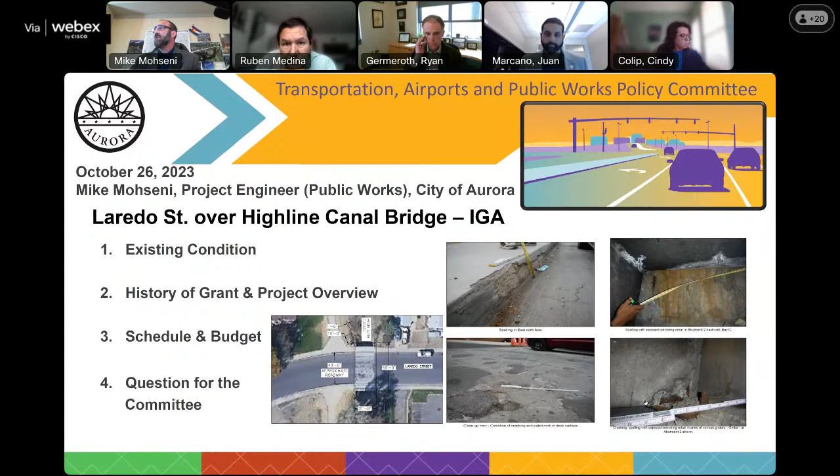Going with the existing condition, the photos show a plan view from the top. As you can see, there's a lot of problems with the deck area because the girders are actually representing the deck itself. The sidewalk, as you can see, is falling. The girders have not had the latest code when it was designed in 1970 and built, so they have some issues with cracks at the end being unconfined.

History of grant request and project overview: October 26, 2022, City of Aurora attempts request grant to replace existing bridge through Colorado Municipal League, a nonprofit organization which works with cities and municipalities to cater to their needs. April 23, after several attempts and presenting different documents to them, Aurora receives approval letter from CML to fund bridge replacement. October 26, 2023, which is today, we're in TAPS for approval to execute the CDOT funding IGA.

Just to give you a little bit of the scope of work here, on the right side there is the depiction of the section views of the new structure. It would be a CBC bridge. Design and construction would be for a vehicular bridge, which spans Laredo Street over Highline Canal. Laredo Street, for those that may not know exactly where it's located, it's about 5 blocks east of Chambers on Colfax, and then the bridge itself is 2 to 3 blocks

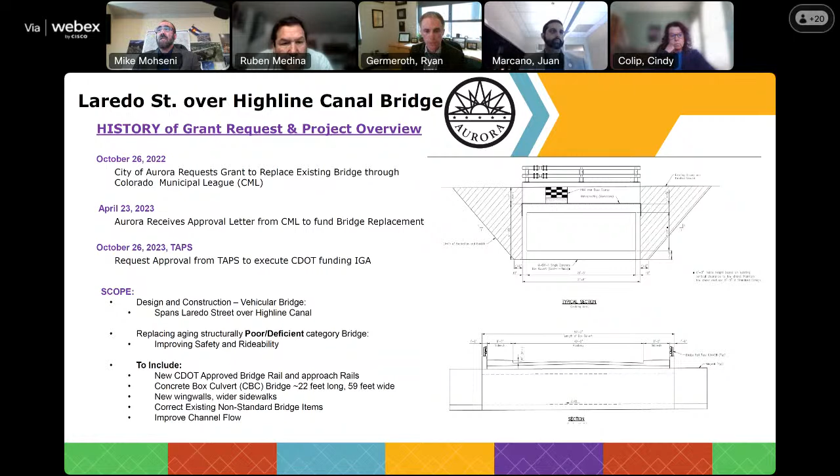north on Laredo. We're replacing an aging, structurally poor, deficient category bridge. We have a few of those bridges we've been able to get grants for, and hopefully we can one by one replace all of those bridges too. On this bridge, we're going to include new CDOT bridge rail, approach slab, approach rails, and bridge rails. As I mentioned, it's going to be a concrete box culvert, approximately 22 feet, 59 feet wide. We're going to have new wing walls, wider sidewalks. We'll correct the existing non-standard bridge items and improve the channel flow.

We have the proposed schedule and budget here. The proposed schedule would be for early 2024 to have the IGA executed, and for fiscal year 2024-25, design and environmental assessments would be taking place. 26-27, we're planning to be in construction, and hopefully by 27 or early 28, the new structure open to traffic. Total estimated bridge replacement cost is $2,223,700.

CML/CDOT has federal award funding share, and the funding is as follows: federal 80%, local 20%. For the numbers you see on the screen, 1.8 million almost, and 445,000 for the local, for a total of 2.223 million.

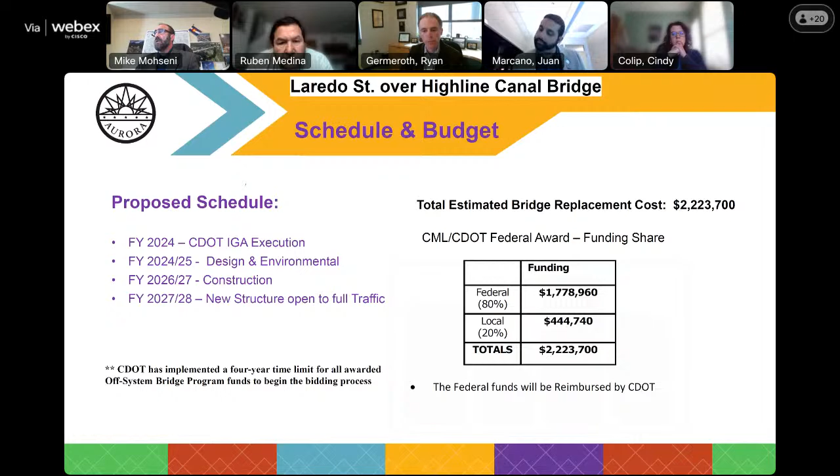With that, my presentation is over. I have a question for the committee: does the council committee support moving forward the resolution and the intergovernmental agreement with Colorado Department of Transportation and City of Aurora for the Laredo Street over Highline Canal Bridge replacement project to the December 11th study session? I'm here to entertain any questions.

Thank you, Mike, for the presentation. Councilor Medina, do you have any questions or comments? Well, thank you, Mike, for the presentation. Now it looks like that bridge is definitely overdue, so I'm glad it's getting some attention. Agreed.

Yeah, and likewise, I think that bridge needs some love, and I'm really excited to see that the federal part of this is 80%. I think that's very generous, and Lord knows we need some infrastructure investment, so I strongly support this. Thank you. I appreciate that.

Next up on our agenda is 4B, Vision Zero and Transportation Safety Evaluations. I believe, Carlie, you're up for this one.

Yes, this is my item. Let me know if you can see my screen. Everybody see it now? Okay, great.

My name is Carlie Campuzano. I'm the traffic manager in the Public Works Department. This presentation is on Vision Zero and how we conduct transportation safety evaluations.

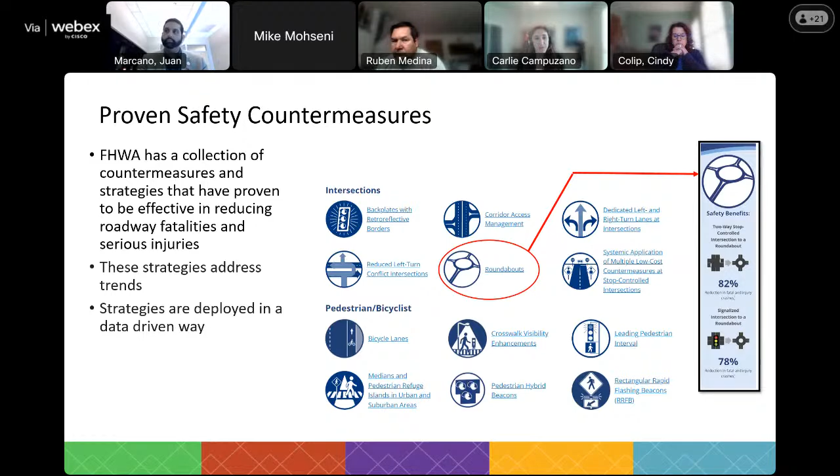With that, I wanted to get into some of our current and planned projects on the books. First, one I'm really excited about is a safety action plan. We partnered with Adams County, who are taking the lead, as well as other agencies, and we're going to do a very comprehensive safety action plan starting next year.

It's funded by a TIP grant, about a $2 million project, and it'll help us look at what's going on at a bigger level too, not just in Aurora, but a deep dive into all of our crash patterns and fatal crashes in Aurora. That effort starts next year, probably a one to two year timeframe, and will come with a commitment to reduce fatal crashes. A lot of the Vision Zero elements we're talking about will be encompassed in that plan.

We also recently kicked off a multimodal transportation master plan. We'll bring information to the TAPS committee specifically on that later, so I won't get into it much, but through this effort we'll get a lot of public feedback, which will help inform future roadway standards. A lot of what we're talking about with safety can also be incorporated into the master plan.

We also have specific design and construction projects funded from grant money. Right now we're rebuilding five traffic signals based on crash patterns and some of those approach turn type crashes we were seeing. Those are under construction right now.

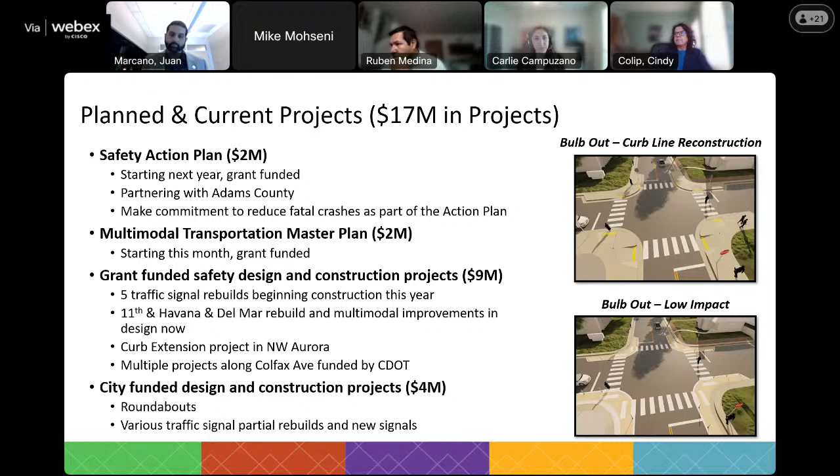And then some completed safety projects. We've done some of the smaller, lower cost projects I talked about, including some all-way stops, like Piccadilly and Stephen D. Hogan, and County Line and Powhatan. We have 2 more all-way stops coming in the next month for safety related reasons as well.

Next, I wanted to touch quickly on the fiscal impact if we were to adopt Vision Zero. Chair Marcano, I think this is something you specifically requested a few months ago, so we wanted to include it. We looked at all the Vision Zero requirements and how other agencies have needed to staff up to meet them. Based on that, we would need 3 full-time staff to run a Vision Zero program, plus costs for annual reporting and updating the safety action plan, and annual funding to implement projects. On the low side, as a minimum, we estimate about $2.4 million per year if we adopt a Vision Zero program, and that would be a recurring expense.

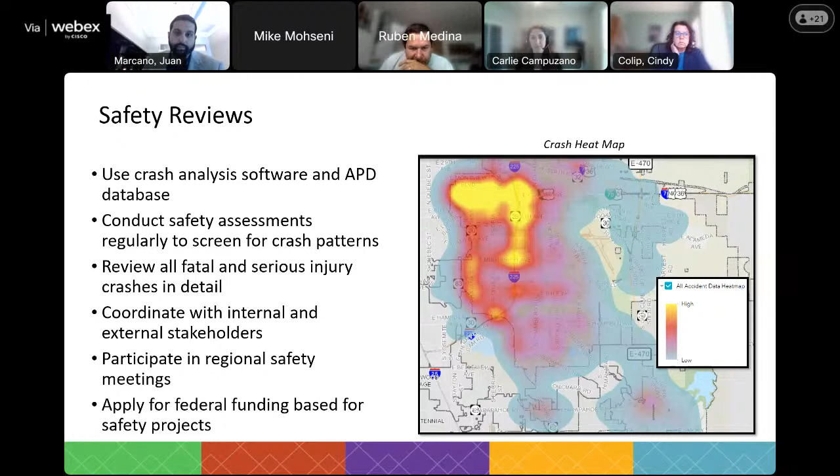Carlie, I've got a couple questions for you. You included the costs for what a Vision Zero program would look like, which I appreciate. But I also want to know what are the benefits that we derive from that - my understanding is that you'd get access to different grant funding sources and things like that. Could you elaborate a little bit on that?

Yeah, that's a good question too. The benefits would hopefully be that you decrease crashes, but I think the hard part about Vision Zero is the agencies that have adopted it really haven't seen that benefit be actionable at this point. And it's not because of their program, it's really just regional trends - you can't fully fix everything and redesign roads and change driver behavior just by throwing money and full-time staff at the issue. So the hard part with adopting Vision Zero is you're committing to this goal to reduce crashes by a certain amount in a certain time frame, and that's not really what we've seen other agencies achieve.

But as far as other benefits with applying for grant funding, we've actually still been eligible to apply for grant funding because we're in the DRCOG region, and DRCOG was one of the agencies that adopted Vision Zero. So we haven't been excluded from any of the safety grants. We've actually been actively applying to a lot of safety grants and have a lot of safety grants on the books right now with projects that we have funding for design and construction for, which is honestly a good thing and has been really helpful that DRCOG was able to do that.

Yeah, I guess following up on that point, I'm glad that we're able to do that as a member of DRCOG. Would pursuing our own plan and commitment make it more likely that we receive this funding, or open up a different tranche potentially, in addition to maybe something we could get from DRCOG? I guess from your perspective, is that how the program would work?

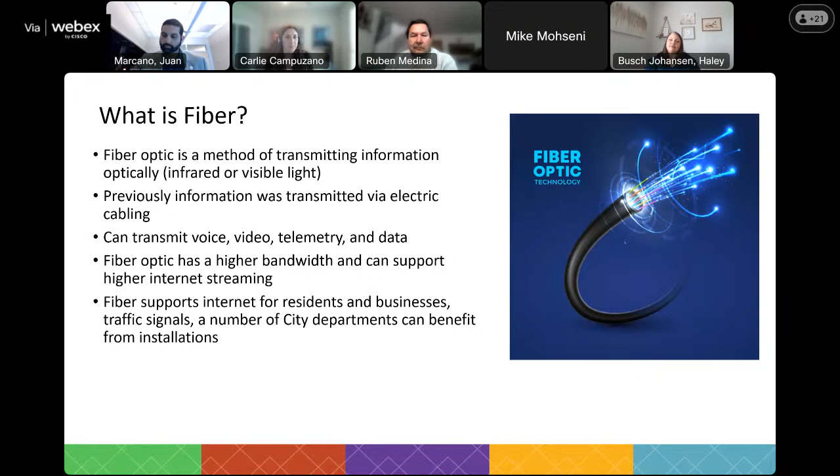Fiber companies request to install infrastructure in the city right of way. Traditional fiber installations are typically a bore method at a minimum depth of 30 inches. Some installations may include trenching, which is an open cut from the surface of the roadway. During development review, the city requires fiber conduit to be placed for future installations to support city functions. The city can request during development projects that additional conduits be placed for new or modified traffic signals, or when there's new roadways or roadway widening projects.

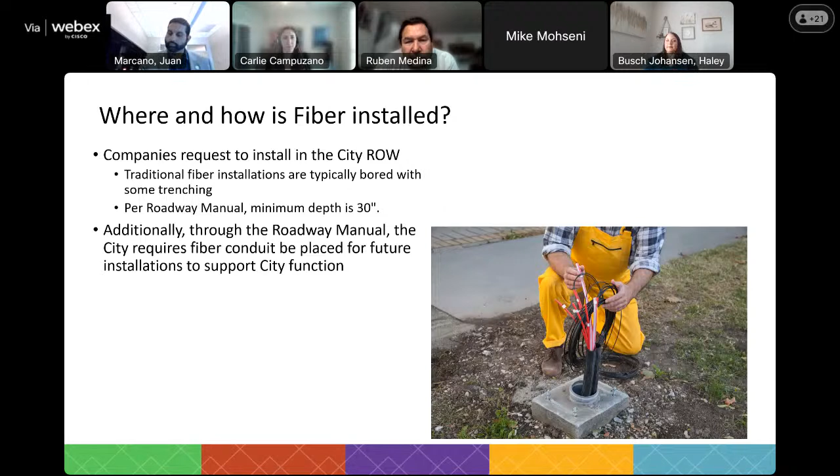Fiber companies apply to be in the city, and the city enters into agreements and provides permits to companies to allow for fiber installation. These agreements include public improvement permits for work within the right-of-way, master license agreements between the city and the fiber company, and we also review fiber plan sets, similar to our civil plan sets that we review in development review. Fiber applications are required to adhere to our current city code and criteria.

In 2022, the city developed the fiber optic standard operating procedure guidance document, which generally provides consolidated guidance on the city's most relevant code and criteria for fiber installs. For that initiative, public outreach to the fiber community was completed, and feedback was incorporated into that document. Another thing to note about telecommunications permitting is that if we allow something for one fiber company, we need to allow that for all fiber companies — they must be treated fairly and equally.

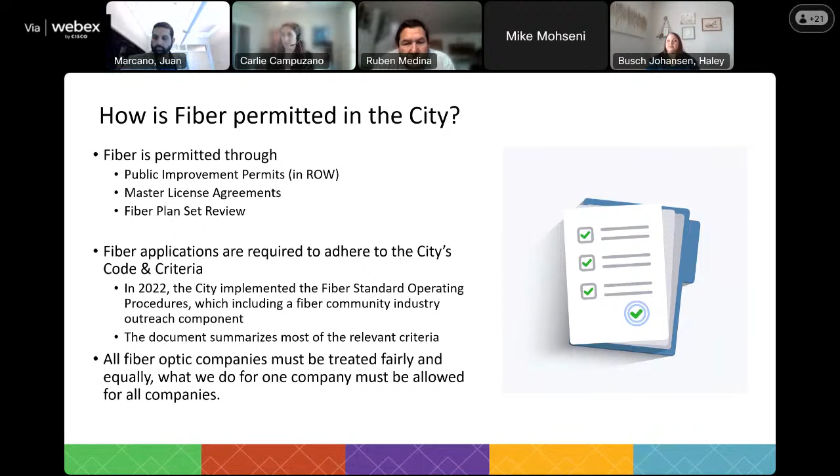A couple of years ago, the city received a proposal for a microtrenching installation. This method differs from traditional fiber by cutting a 1 to 2 inch wide section in the pavement, about 10 to 24 inches deep, laying the fiber optic line within that cut, and then backfilling with a proprietary mix of cement, aggregate, and chemical additives.

The benefits to microtrenching installation can include less surface disturbance, fewer utility conflicts, faster build, and if the city requests, some companies may agree to install a second line for city use — though that incremental cost, if requested, would be an expense to the city. There's a couple of example pictures on this slide: the left-hand photo is an initial installation of microtrenching in the metro area across a concrete sidewalk, and to the right is a stock photo of an in-process installation.

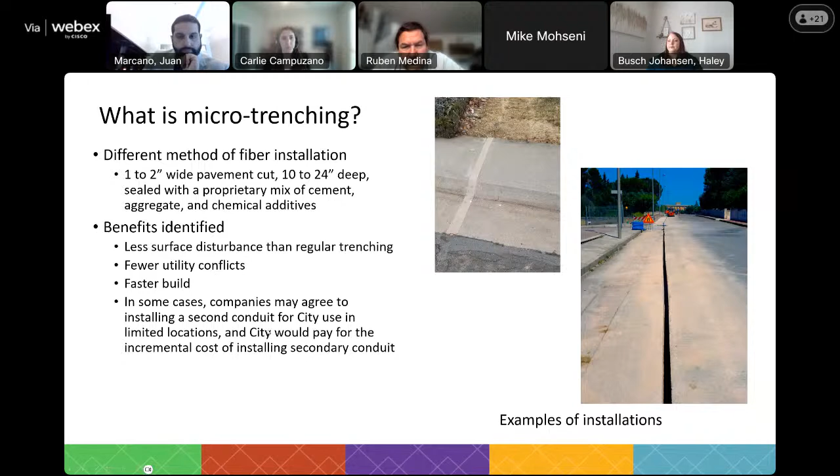City staff evaluated both the benefits and the concerns related to microtrenching. This slide shows example pictures within the metro area of installations. The left-hand picture is the same location from the previous slide, showing after a period of time that the concrete tape filler deteriorated and was removed — it was reported that this condition was in disrepair for months, so it wasn't quickly repaired. The right-hand picture shows an installation in a pavement section, also after a period of time, showing some deterioration of that proprietary sealant at the top.

The concerns identified with microtrenching include long-term pavement integrity. Our local street sections have smaller pavement depth and are below the minimum pavement condition, so this could impact the pavement condition and the longevity of the Build Up Aurora program.

Some concerns that we hear from residents is restoration of disturbed areas, usually when there's disturbance to the front yard or sidewalks. We've also heard from another jurisdiction that during mill and overlay efforts for pavement restoration, broken microtrench lines needed a full replacement.

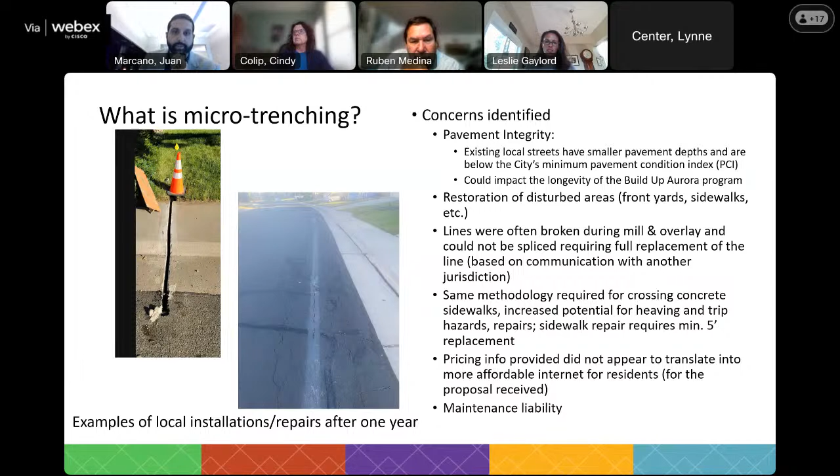So, yeah, let us do that then. I appreciate that. Thank you. And thank you all for the presentation. It's been informative, and I'm hoping that we can find ways to protect our residents, protect our infrastructure, but allow for more options in the city. All right, thank you all.

And finally, we're on to 4D. That is consideration to approve a resolution for an intergovernmental agreement between the City of Aurora and the City and County of Denver for the Colfax Bus Rapid Transit Project construction phase.

Yay, BRT. Carly, you're back on the floor. Yes, thank you, Chair Marcano. It is me again, Carlie Campuzano, Traffic Manager with the Public Works Department.

This item is to approve a resolution for an IGA between the City and County of Denver and the City of Aurora for the Colfax Bus Rapid Transit, or BRT, project. This is for the construction phase. We already had an IGA that we brought forward last year for the design phase, so you've heard a lot of this information already. This is just for the construction phase that goes along with that.

So I'll give a few updates as part of this presentation. I have a couple slides with overviews of the BRT project since it's been a few months at least since this has come to council. The Colfax BRT project is a regional project that involves the City and County of Denver, which is really taking the lead. Aurora is pretty heavily involved at this point, as well as CDOT and RTD.

This map shows the limits of the Colfax BRT project. You have the area in yellow in the downtown section connecting Union Station and Civic Center, which is about 1.4 miles. Then you have the blue section, which is really in the Denver city limits. And then we have the Aurora section, which is about 3 miles from Yosemite to I-225.

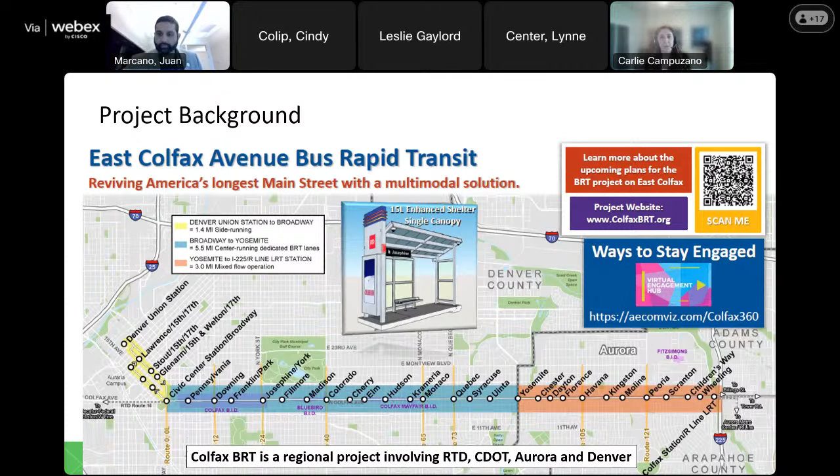And that's the area where the BRT will be center running with dedicated lanes in the Denver section. In the Aurora section, the BRT will be side running, mixed flow with traffic, but there are various enhancements included that I'll talk about a little bit. Overall, the corridor is over 9 miles in length and connects the I-225 interchange with the downtown Union Station area, following the current 15 and 15L routes.

This project has been under study, planning, and design for over 10 years now, and Aurora has been a stakeholder throughout this process through a lot of different milestones. I won't go over all of this, but it's been a very long, evolved process, and we're finally getting to the end where we're going to see the project implemented, and construction will start next year, which is really exciting.

The project really gained speed in 2020 through 2022, when Denver initiated the environmental clearance and initial preliminary design process, which is the NEPA process. There's been a lot of different community outreach touch points as well, here in Aurora, in the last couple of years.

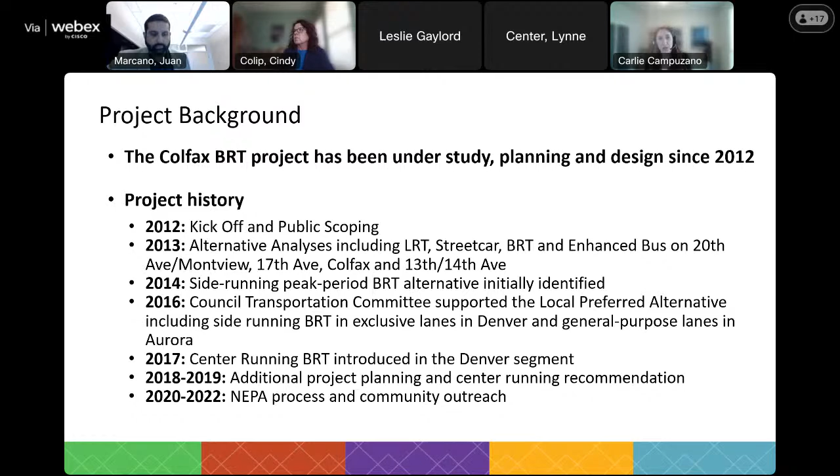So just as a refresher of what BRT elements are and what we're going to see in Aurora: in order for a line to be considered BRT, there are certain minimum requirements required as part of the Federal Transit Administration, or FTA's, definition of BRT. These elements include having shelters, benches, trash receptacles, lit maps with schedule displays, and branding in order to be considered a BRT line.

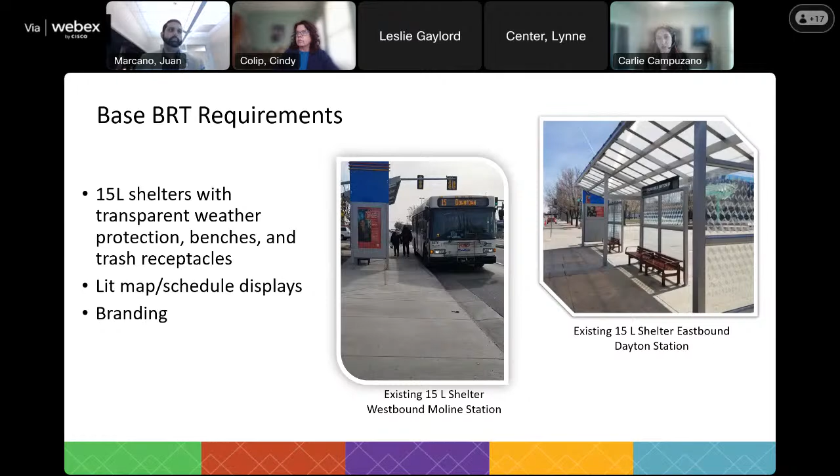At a minimum, all of those enhancements are included at all of the stations in Aurora as well as in Denver. Back last year, what we brought forward to council were staff recommendations of additional enhancements beyond the minimum requirements that we had proposed within Aurora. We took a pretty detailed list on the staff level in Aurora with all the different options, along with Denver, and developed some recommendations that were then approved by council last year.

Some elements that are going to be included in the Aurora section are signature stations at the two Havana stations in both directions. We'll have a signature station similar in aesthetics to some of the enhanced Denver stations. We're trying to include other elements such as ticket vending machines, variable message signs, emergency phones, and security cameras.

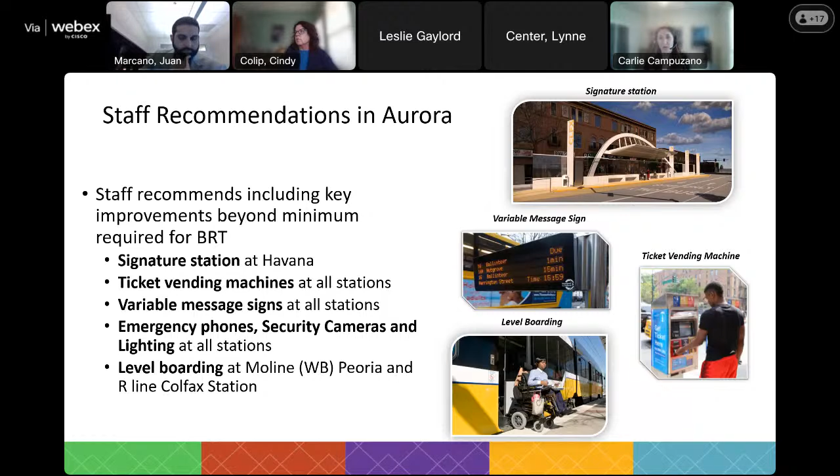This project is being funded significantly by a large FTA grant. It's a small starts grant, and Denver and RTD have been very active in pursuing this grant, and that will include about $127 million worth of funding. Denver also had different bond initiatives that allowed them to dedicate large amounts of their local match, and there's a DRCOG TIP grant covering part of the match. In our last funding strategy, it's planned that the city of Aurora will contribute about $14 million total, and that total is for design and construction.

The design IGA went through council and was executed last year. Through that, we allocated $2.3 million for the project to take us through design. Design is still going on right now and will finish up early next year. Design has been coming along well recently. This IGA we're discussing now is just for the construction portion, and these are pretty much the same numbers that we presented previously.

Construction is expected to begin mid next year on the project, and the Aurora amount will be $11.7 million, which includes funding for the work that will be done in Aurora. Denver can't spend their own local money outside of their city limits, so this money is what's needed to include some of those elements we'd accounted for beyond the minimum within Aurora. The really good part about participating in this regional project and grant is that we're also benefiting from the grant funding. Part of the FTA grant will cover about half of the costs in Aurora as well. So by contributing this $14 million, we're actually getting almost $28 million worth of infrastructure upgrades in the Aurora section.